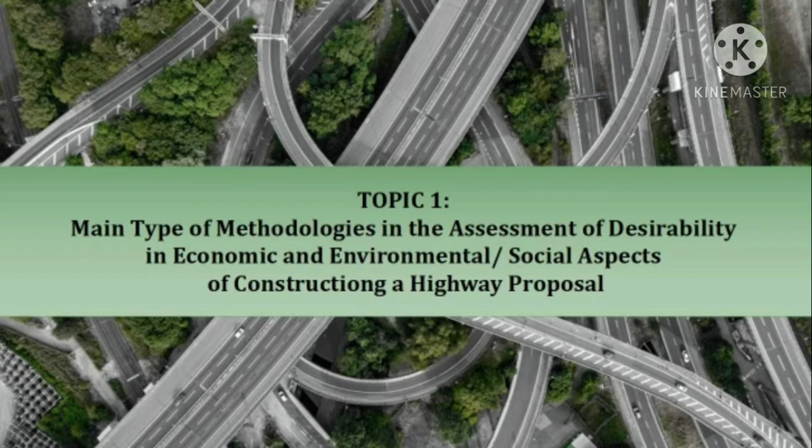The topic is the main types of methodologies in the assessment of desirability in economic, environmental, or social aspects of constructing a highway proposal. The first one is the economic appraisal of highway schemes.

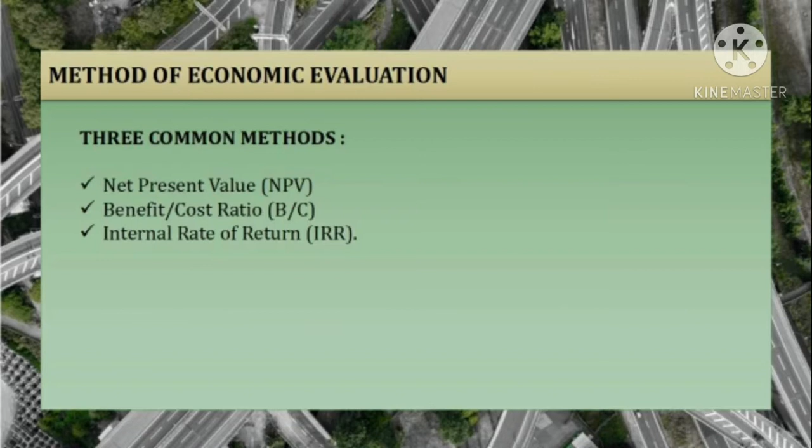In the development of a highway project, the developer will require economic assessments of the route options under consideration. These are the methods used in the economic evaluation.

The application of economic analysis allows decision makers to make better choices regarding the alternative uses of scarce funds. In the case of infrastructure alternatives, those choices are made under conditions of limitation.

Due to the scarcity of resources, decision makers must direct their expenditure to those projects that offer the most efficient outcomes, and cost-benefit analysis, or CBA, can be used to help make these decisions.

So what is cost-benefit analysis? It is the method usually adopted for the economic evaluation of highway schemes. It utilizes the net present value technique, where the costs and benefits of the schemes are discounted over time.

So that they represent present-day values. Using this method, any proposal having a positive net present value is economically sustainable in absolute terms.

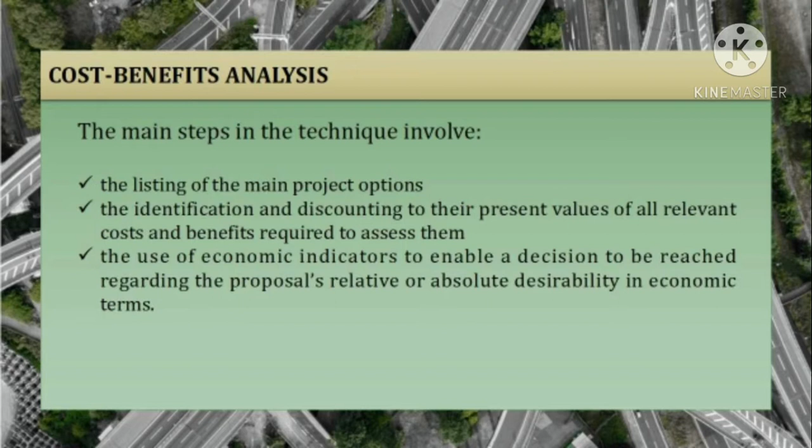So let us proceed to the identification of the main project options. This is a fundamental step in the cost-benefit analysis process, where the decision makers compile a list of all relevant feasible options that they wish to be assessed.

It is usual to include a do-nothing option within the analysis in order to gauge those evaluated against the baseline scenario where no work is carried out.

So what do we mean when we say to do nothing? By this, I mean simply accepting things as they are. Like all options, the risks and benefits of doing nothing have to be considered.

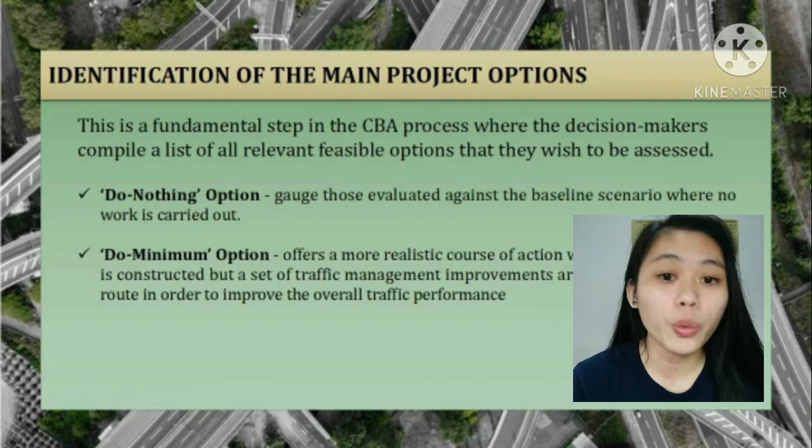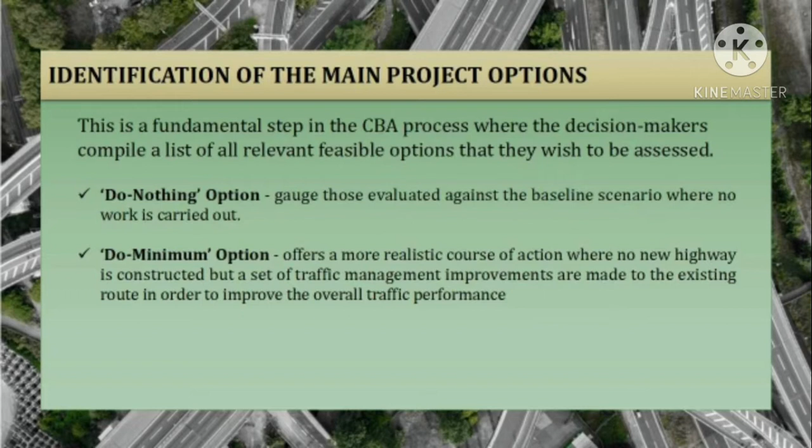While the do-minimum option offers a more realistic course of action where no new highway is constructed, but a set of traffic management improvements are made to the existing route in order to improve overall traffic performance. The do-minimum option provides the least cost solution for achieving the project goals.

There are many procedures for both identifying and defining project options, and these include drawing on the personal experience of the decision maker himself, as well as other experts in the highway engineering field, making comparisons between the current decision problem and ones previously solved in successful manner, and also examining all relevant literature.

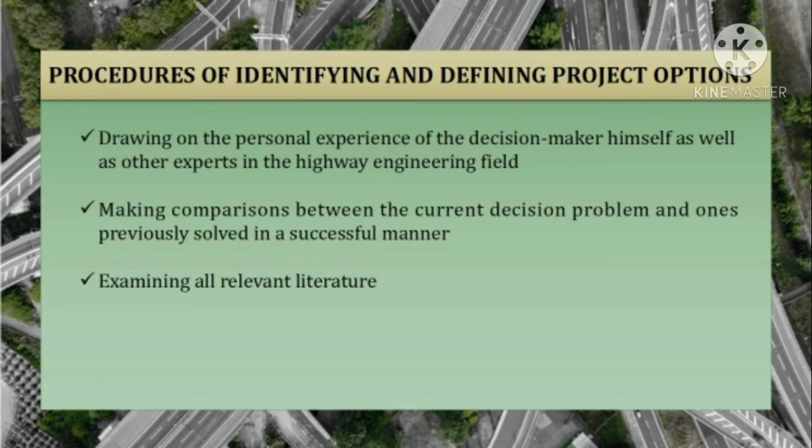And for us to have new options, we need to brainstorm. Brainstorming consists of two main phases.

Within the first phase, a group of people put forward in a relaxed environment as many ideas as possible relevant to the problem being considered. So the main rule for this phase is that members of the group should avoid being critical of their own ideas or those of others, no matter how far-fetched.

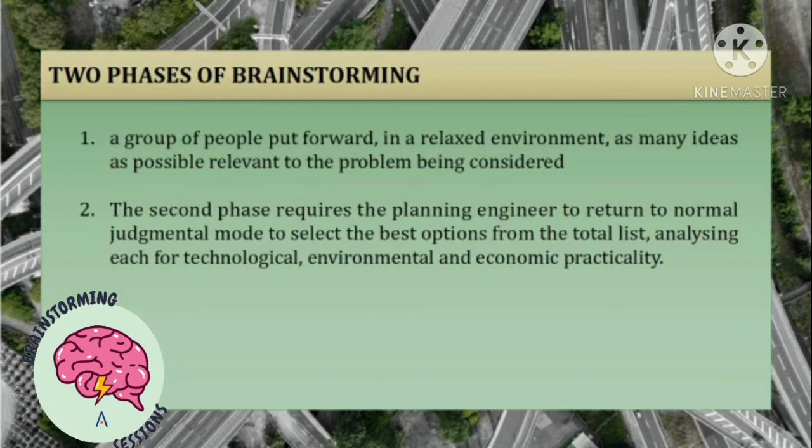The second phase requires the planning engineer to return to normal judgmental mode to select the best options from the total list, analyzing for each their technological, environmental, and economic practicality.

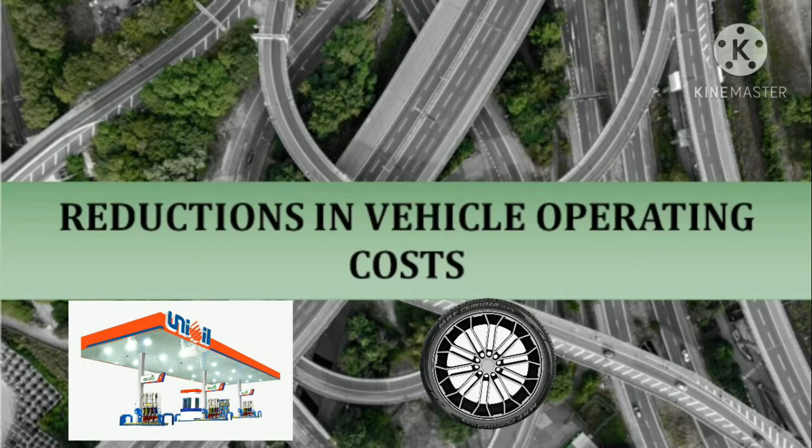In identification of all relevant costs and benefits, there are three primary user benefits, and these are the reductions in vehicle operating costs, savings in time, and reduction in the frequency of accidents.

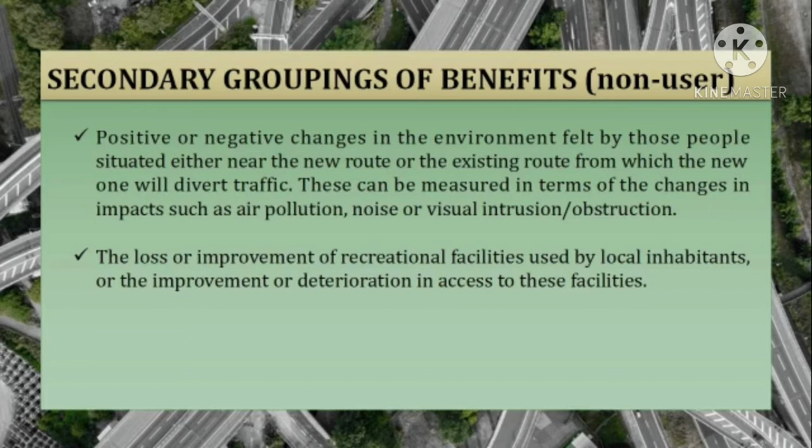There are also secondary groupings of benefits, those accruing to non-users, which include positive or negative changes in the environment felt by people situated either near the new route or the existing route from which the new one will divert traffic, and also the loss or improvement of recreational facilities used by local inhabitants, or the improvement or deterioration in access to these facilities.

The economic life, residual value, and discount rate are the parameters of a project. Economic life is related in principle to the expected lifetime of the project under analysis.

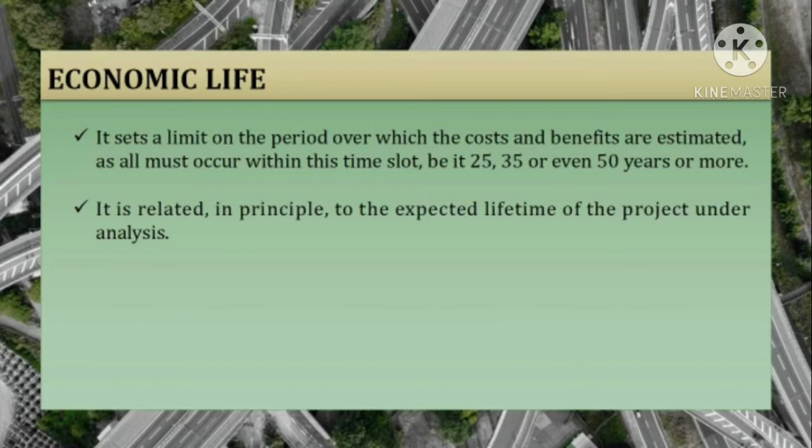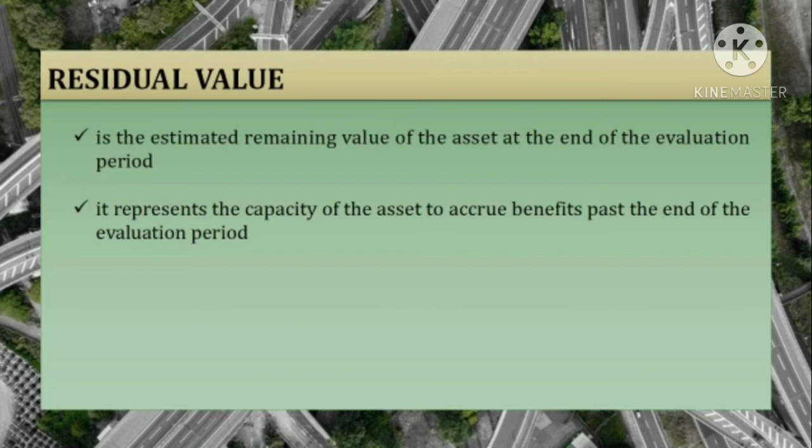The residual value is the estimated remaining value of the asset at the end of the evaluation period, while the discount rate translates all costs and benefits to time-equivalent values, and it is the interest rate at which future payments are reduced to a common time.

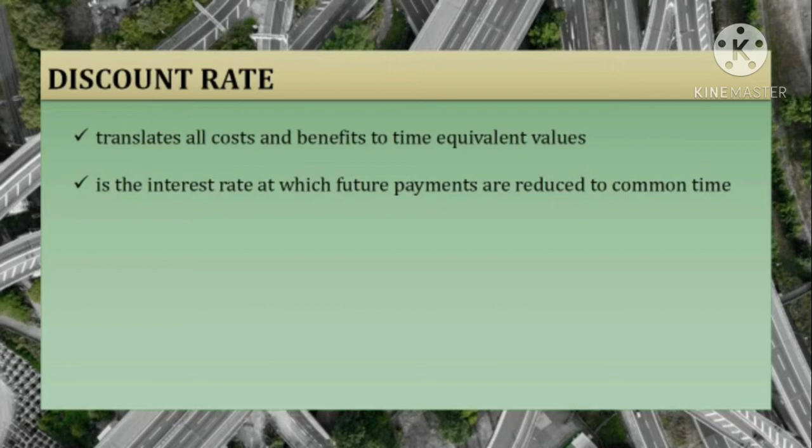Any of these techniques can be used to assess the basic economic viability. The net present value will estimate the economic worth of the project in terms of the present worth of the total benefits. The internal rate of return will give, for each option under consideration, the rate at which the net present value for it equals zero.

With the benefit-cost ratio based on the ratio of the present value of the benefits to the present value of the costs.

Advantages and disadvantages of cost-benefit analysis. For advantages, the use of the common unit of measurement, money, facilitates comparisons between alternative highway proposals, and hence aids the decision-making process.

Another advantage is that it offers a broader perspective than a narrow financial or investment appraisal, which concentrates only on the effects of the project on the project developers, be that the government or a group of investors funding a toll scheme.

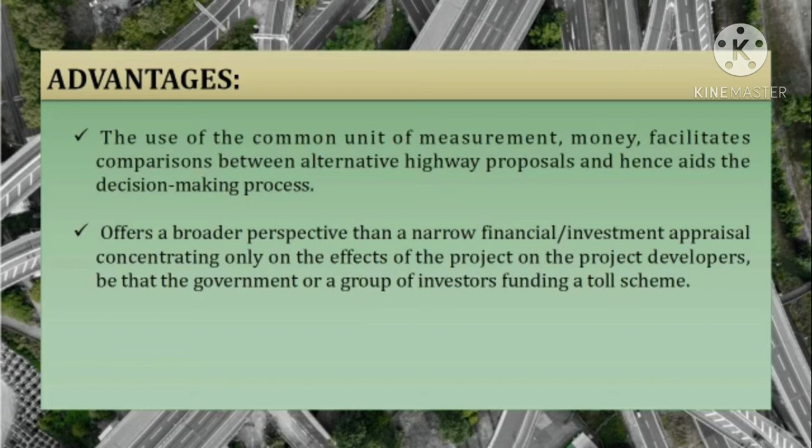For the disadvantages, the primary basis for constructing a highway project may be a societal or environmental one rather than an economic one. The method is more suitable for comparing highway proposals designed to meet a given transport objective, rather than evaluating whether the project should proceed, and the environmental consequences of the project tend to be neglected or at best downgraded within the main economic analysis.

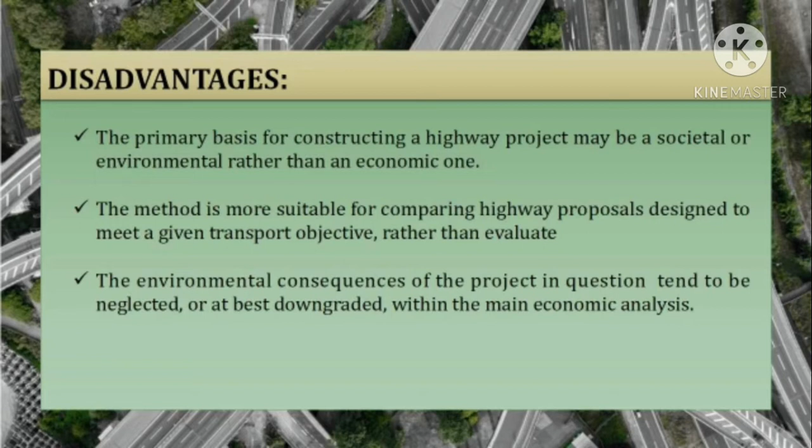Payback analysis is an extremely simple procedure that is particularly useful in evaluating proposals such as privately funded highway projects, where tolls will be imposed on users of the facility in order to recover construction costs.

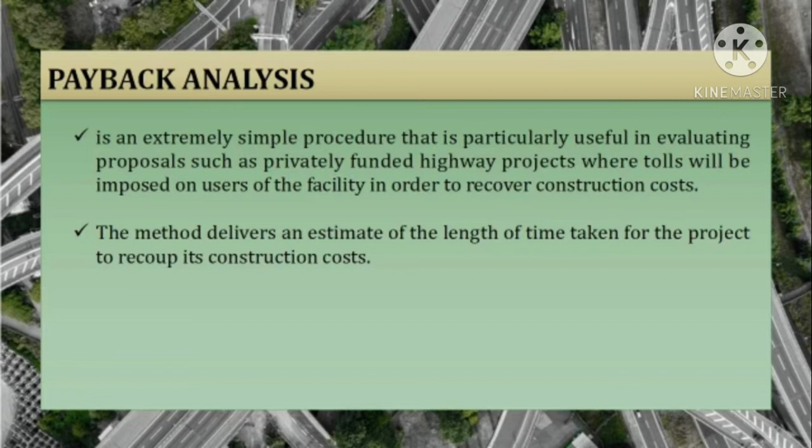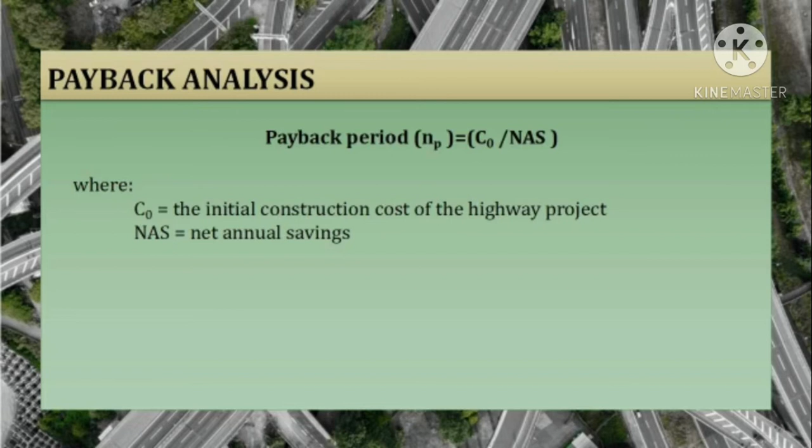The method delivers an estimate of the length of time taken for the project to recoup its construction costs. To compute for the payback period, here is the formula: payback period is denoted as N sub P, C sub 0 is the initial construction cost of the highway project, and NAS is the net annual savings.

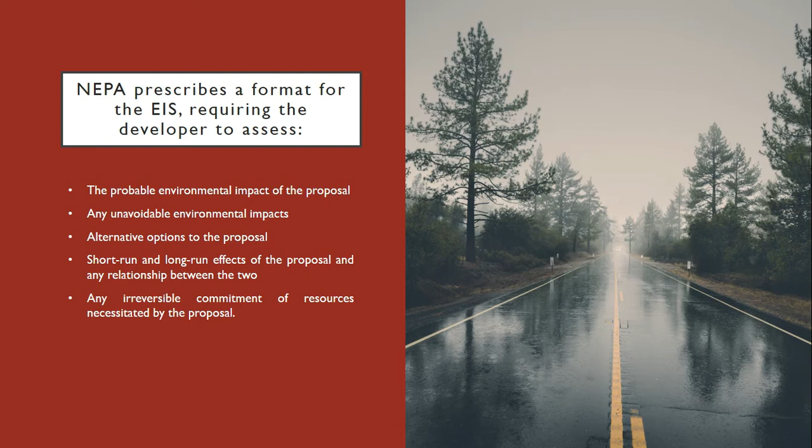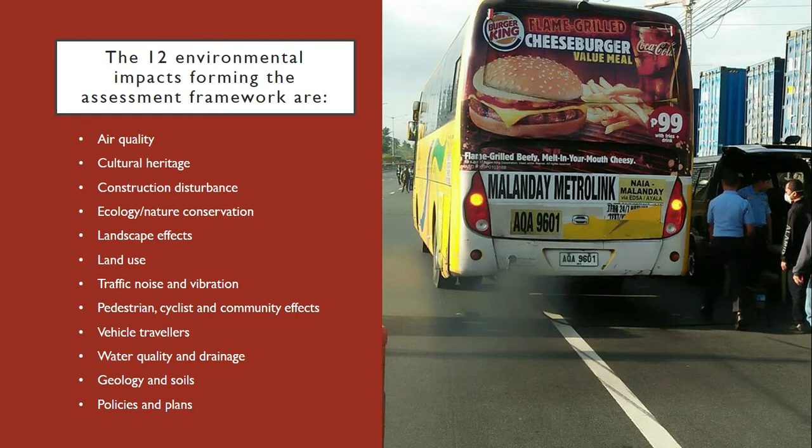The 12 environmental impacts forming the assessment framework are the following: air quality, cultural heritage, construction disturbance, the impact on ecology or nature conservation, landscape effects, land use, traffic noise and vibration, the impact on pedestrians, cyclists, and community effects, vehicle travelers, water quality and drainage, geology and soils, and policy and plans.

Some of the above impacts can be estimated in quantitative terms, others only qualitative. DMRB advises that an EIT be constructed for all relevant appraisal groups.

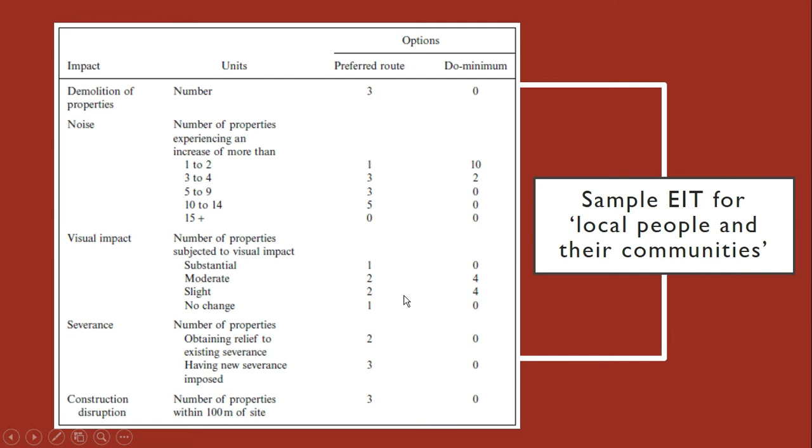Moving on, another scheme appraisal for highway projects is the New Approach to Appraisal, or NATA. The appraisal summary table, or the AST, is designed for presentation to those decision makers who are in charge of determining whether to approve or disapprove a specific project proposal. It constitutes a key input into the process of scheme approval and prioritization. The AST summarizes the assessment of the scheme in question against 5 objectives and their constituent impacts, seen by the government as being central to transport policy: environmental impact, safety, economy, accessibility, and integration.

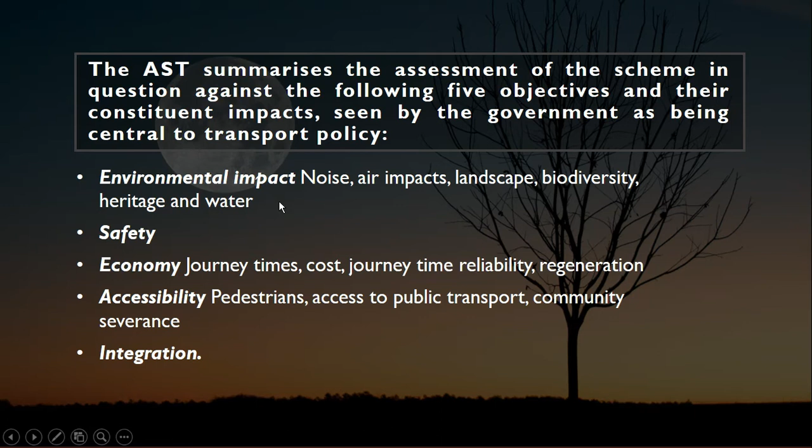Safety: this criterion measures the extent to which the proposal improves safety for travelers. This requires accidents to be broken down into those causing death, those causing serious injury, and those resulting in only slight injury.

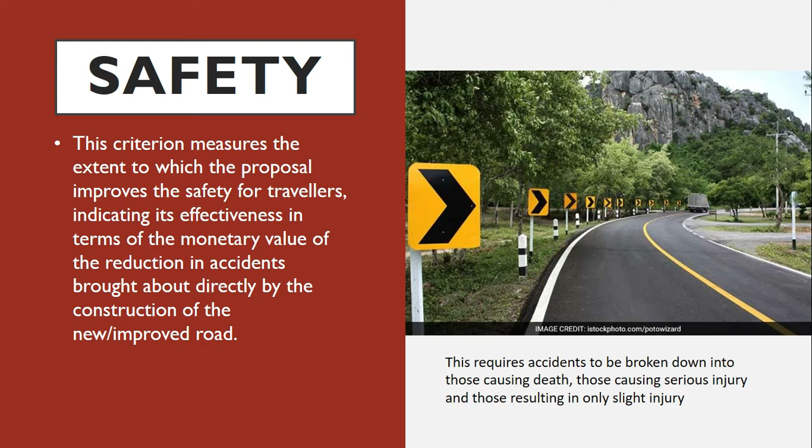There are 4 indicators used in the economy. Number 1 is journey times and vehicle operating costs.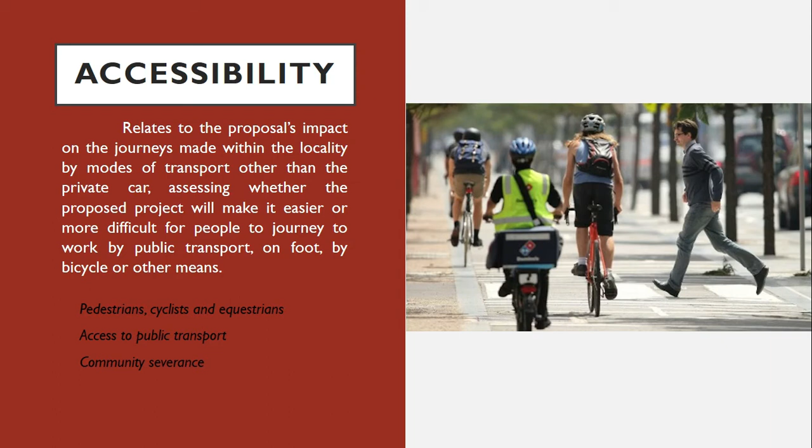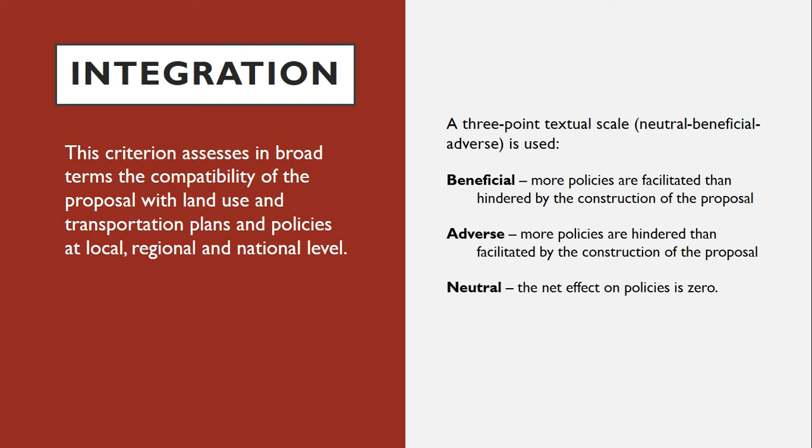Next is the integration criterion, which assesses in broad terms the compatibility of the proposal with land use and transportation plans and policies at local, regional, and national level. There are 3-point textual scale used in integration: beneficial if more policies are facilitated than hindered by the construction of the proposal, adverse if more policies are hindered than facilitated, and neutral if the net effect on policies is zero.

Now we are moving on to the next main topic of this vlog, which talks about the basic elements of highway traffic analysis. The analysis of parameters on highway traffic will directly influence the scale and layout of the proposed highway, together with the type and quantity of materials used in its construction. So this topic on basic elements of highway traffic analysis is very important.

The sections of this topic are speed, flow, and density of stream of traffic; determining the capacity of a highway; the level of service approach; and the last one is the estimation of AADT for a rural road in its year of opening.

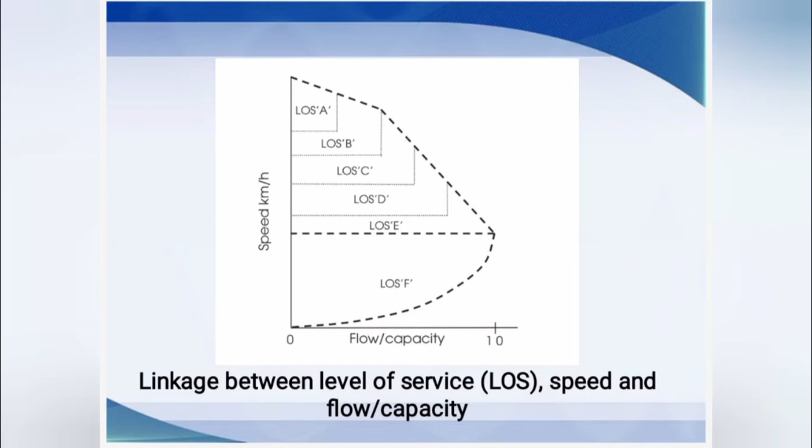This graph shows the 6 levels of service ranging from best to worst.

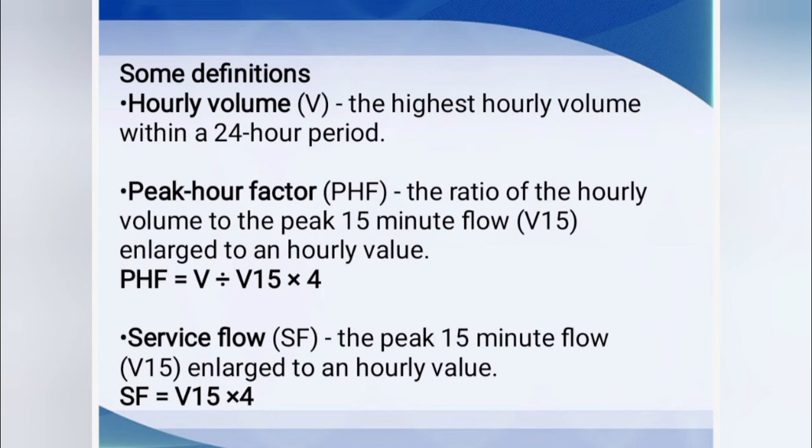Hourly volume is the highest hourly volume within a 24-hour period. To get the peak hour factor, hourly volume is divided by 15-minute flow multiplied by 4, and the other service flow is equal to 15-minute flow multiplied by 4.

To get the maximum service flow rates for multi-lane highways, it is equal to C sub j multiplied by open and close parenthesis V over C sub i, multiplied by n, where n is the number of lanes in each direction, and C sub j is the capacity of a standard highway lane for a given design speed j.

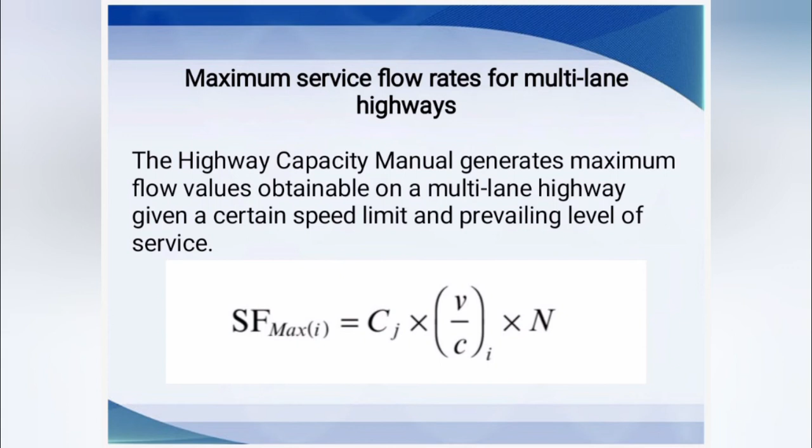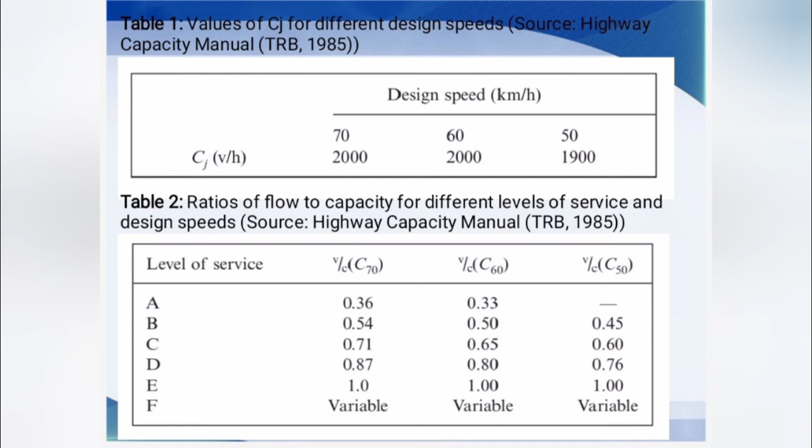From Table 1, it shows the values of C sub j for different design speeds, and from Table 2, ratios of flow to capacity for different levels of service and design speeds.

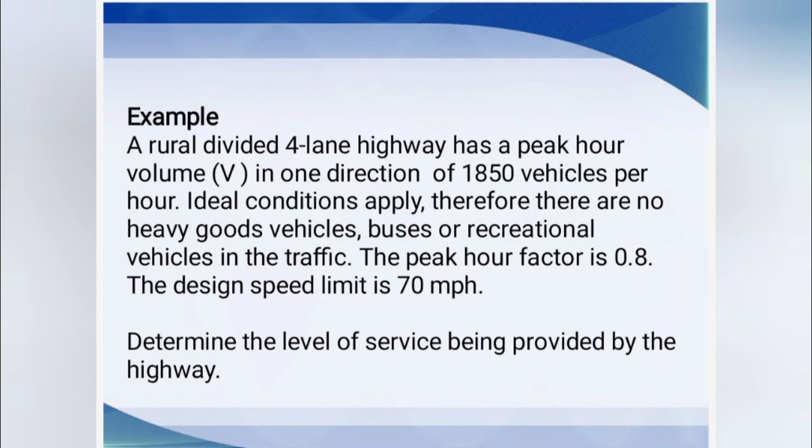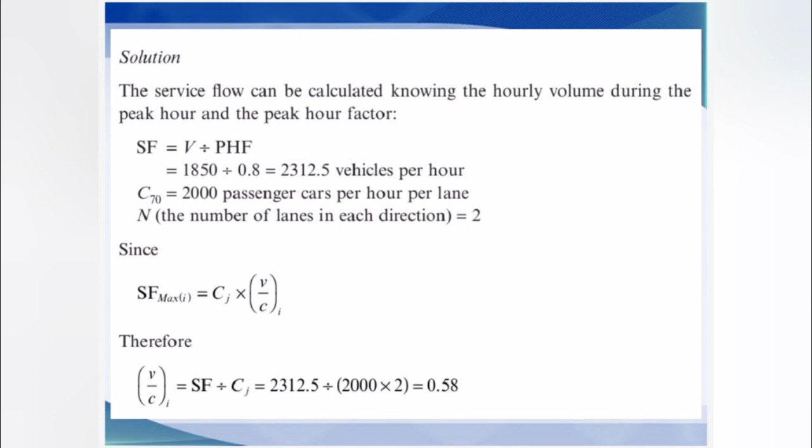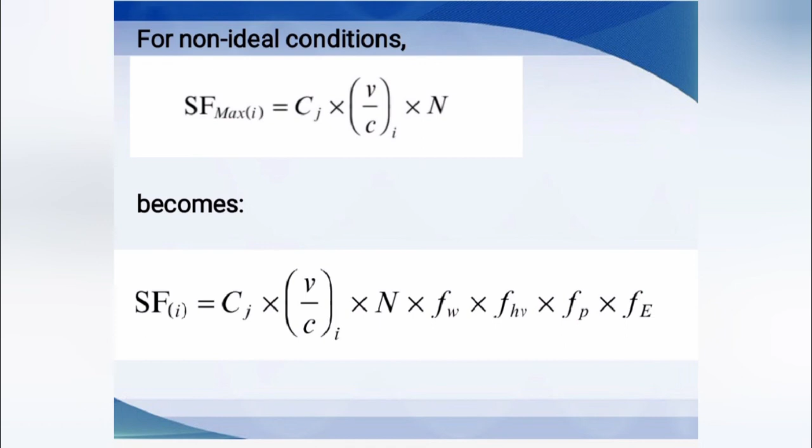These are the formulas for non-ideal conditions, wherein F sub HV is the resulting reduction in capacity, F sub W is the adjustment factor, and F sub E is the correction factor. Heavy vehicles such as trucks, buses, and recreational vehicles have a negative effect on the capacity of a highway due to their physical size, together with their relatively slow acceleration and braking.

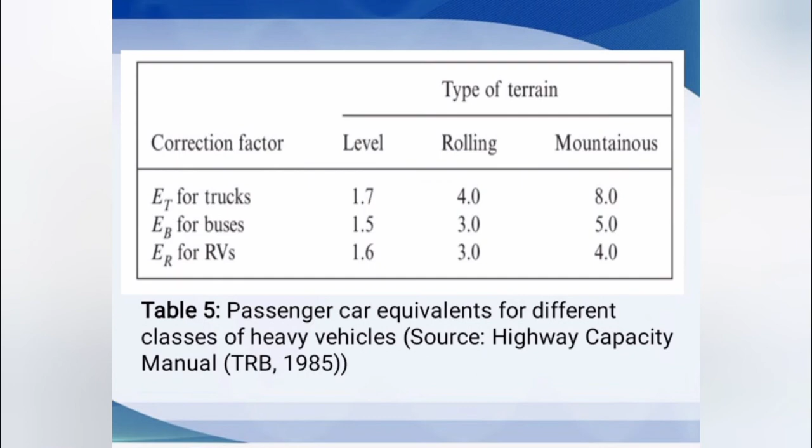These following tables show the different values for non-ideal conditions. Example problem number 2: determine the level of service of this section of highway.

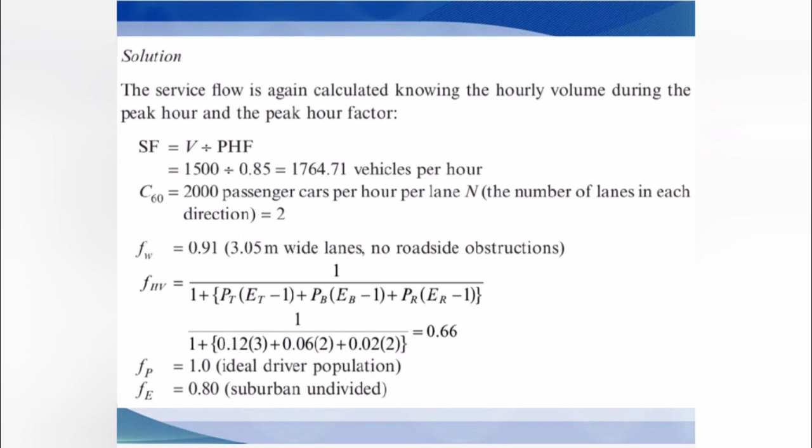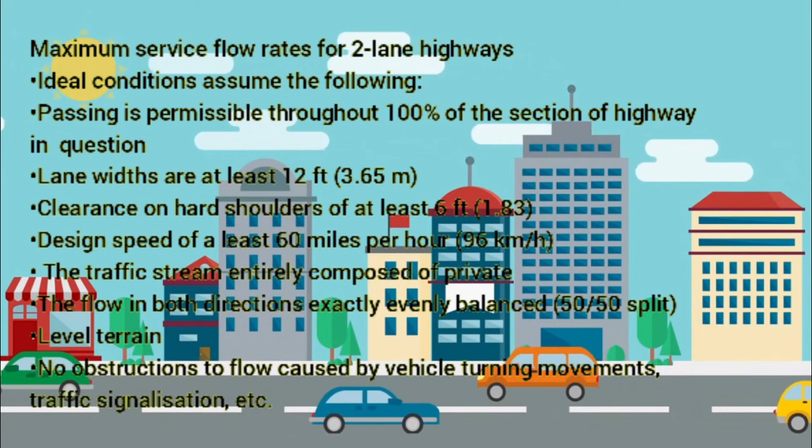These are the following ideal conditions for maximum service flow rates for two-lane highways, with formulas for ideal condition and for non-ideal condition. Example problem number 3: calculate the service flow of the highway when running at full capacity.

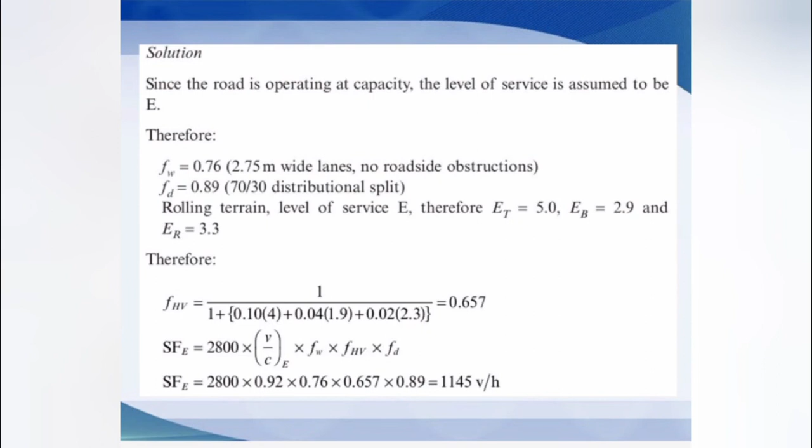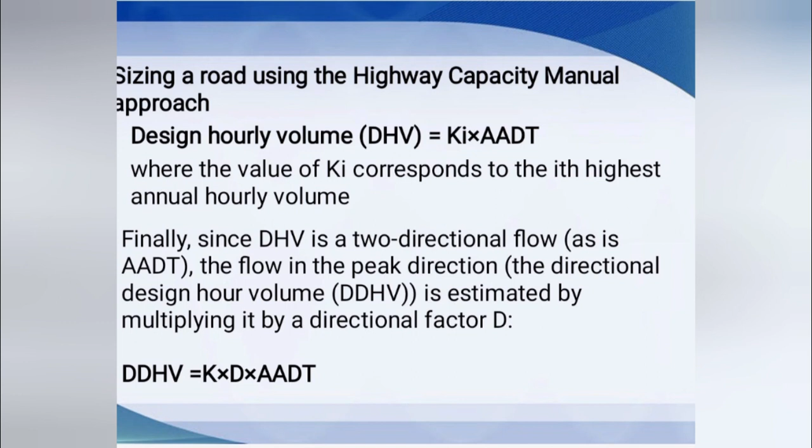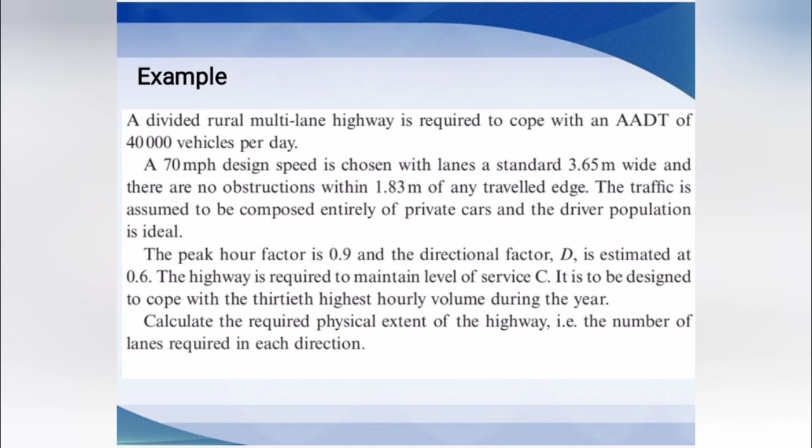Sizing a road using the Highway Capacity Manual approach: when sizing a new roadway, a desired level of service is chosen by the designer. This value is then used in conjunction with the designed traffic volume in order to select an appropriate cross-section for the highway. Example problem number 4: calculate the required physical extent of the highway and the number of lanes required in each direction.

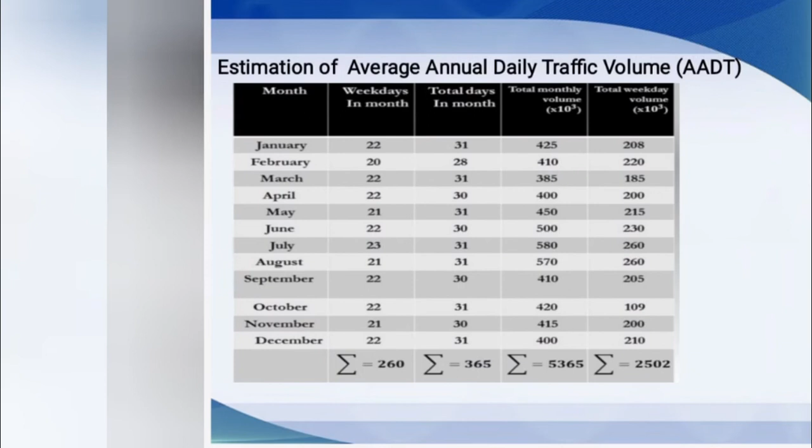Estimation of average annual daily traffic volume, or AADT.